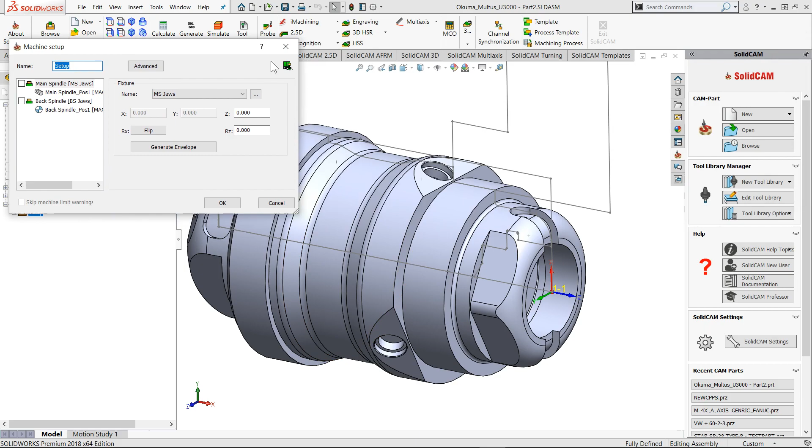First of all, I'd just like to go through the setup. I think this is very important. The machine setup allows us to correctly define the jaws and part position, whether it's on the main spindle or back spindle. As you can see, everything is pretty dynamic. I can modify the part position and jaws position. The jaws can also be a 3D model.

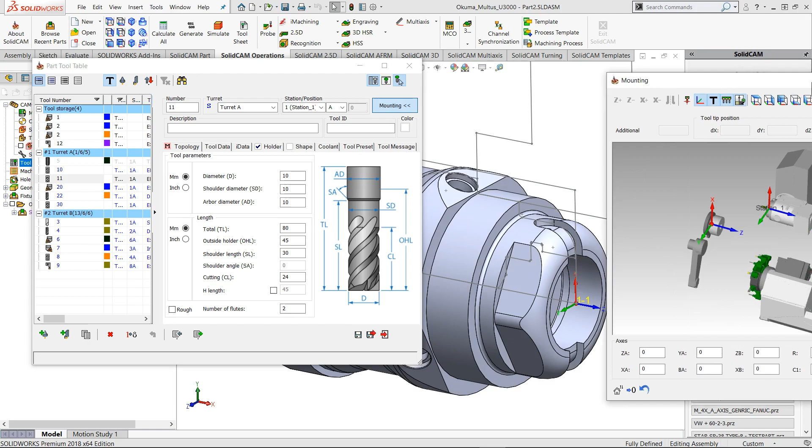Also here we have a tool table, and for the tool table we have all the tools presented in this project. I can click on, for example, the turret A, and again we have a machine preview with all the tools available here. As you can see, this one is selected. I can switch to other tools, maybe a different holder is used, or a turning one. Let me go back to this one. I'd just like to show you how dynamic it is. I can change the diameter to 16 and you can see it changed over here.

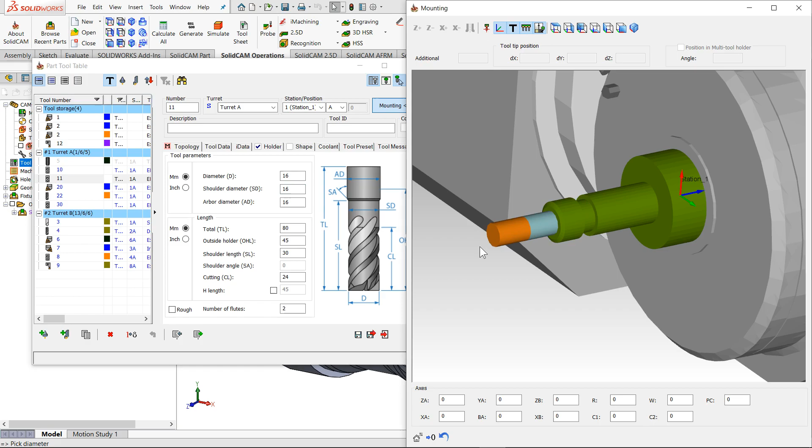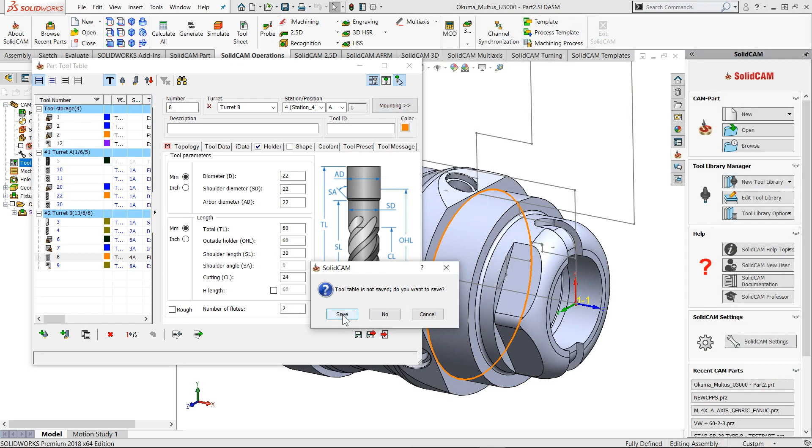Let me go to the lower turret for a moment. We have turret B where you can index to any other turning or milling tool over here. It will index it and you can actually modify it to your will. I'll not save this, I'll just exit, and I'll say no. Now I already have all the operations defined over here.

What we have here are the turning operations, center drill operations, 5-axis simultaneous drilling, C-axis milling from the face, something with the index, drilling on the index angle. Then we have a part transfer from the main spindle to the back spindle, and we have a couple of similar operations also on the back side.

Now, the very necessary step before G-code generation and going to the machine simulation is the channel synchronization. To go to channel synchronization, we have an icon for it, and this is its interface. I won't go into all the details, but basically whatever you see on the left side is for turret A, and whatever you see on the right side is for turret B. The black lines just display the wait labels for the G-code.

If everything defined here is possible to do on the machine, SolidCAM will allow you to generate the G-code and also simulate it. Otherwise, it will not allow you to do so. So I'll just go to the G-code generation and click OK. When clicking on that, SolidCAM goes through the postprocessor, which includes the kinematics and also the format for the G-code.

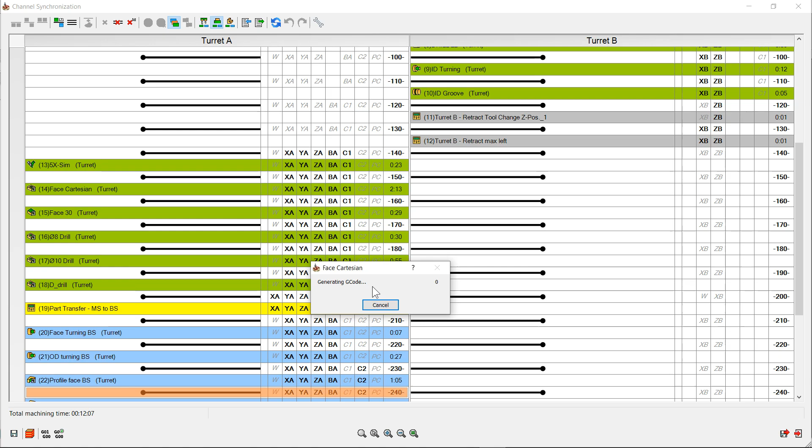Over here, we are checking if the axis overruns a little bit. As you can see, this is for the lower turret, for the drill operation drill 22. In this case, I'll just ignore it. I just wanted to present this to you.

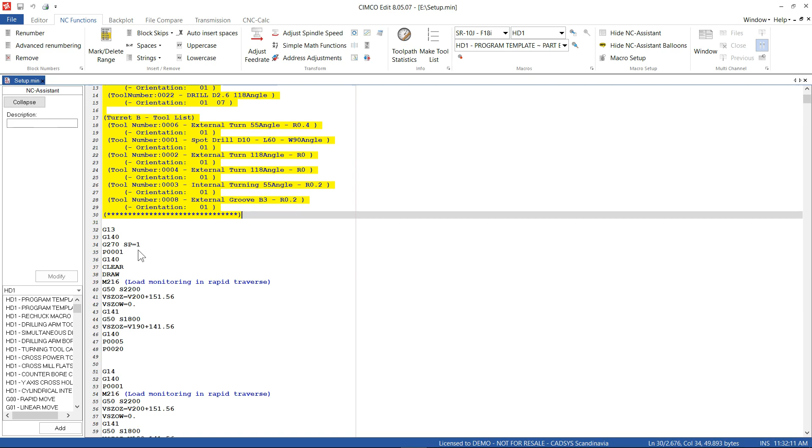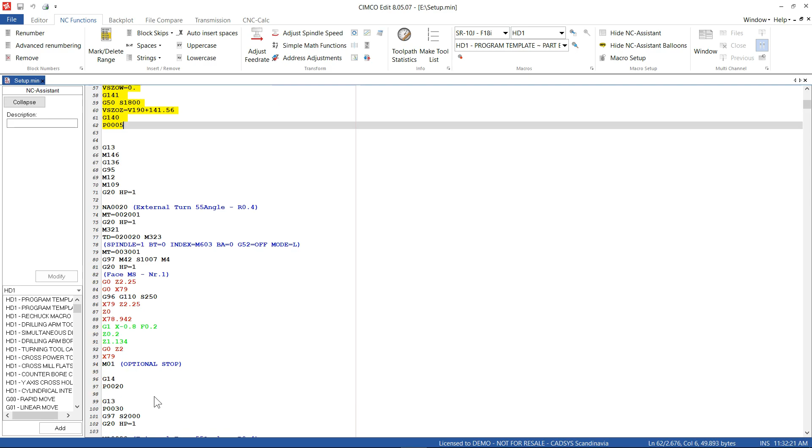Once everything is done, I'll close those two. Here we have how it looks like. We have all the tools over here in the header, and the project name. Also, we have a couple of codes for loading the work offset on the main spindle, also for the back spindle. Then we have turning operations, also for outside turning. As you can see over here, we have a cycle.

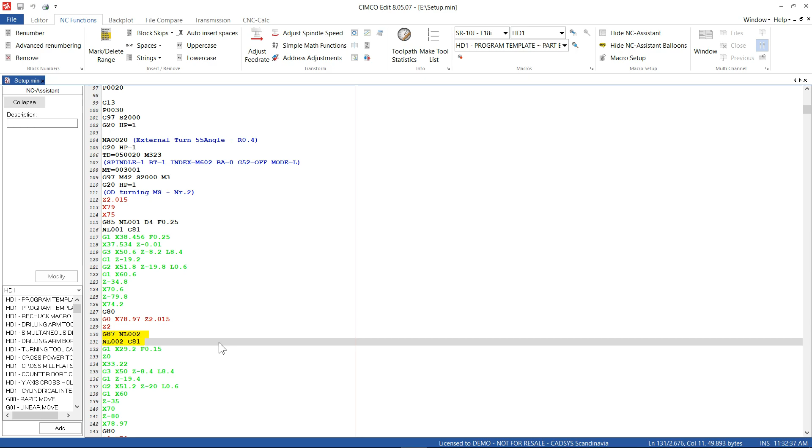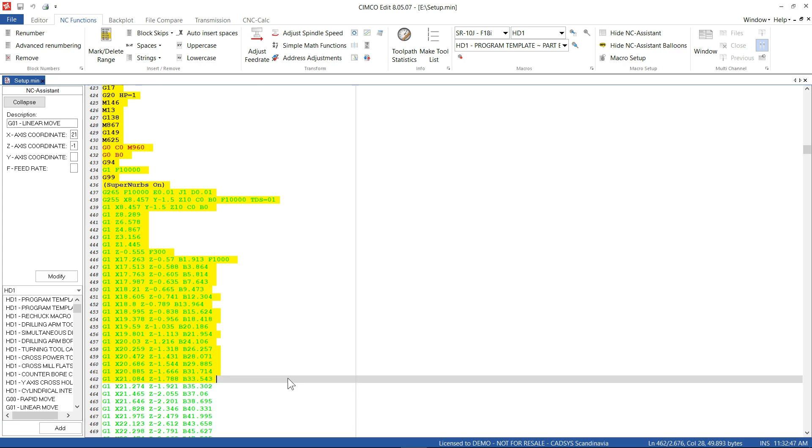This is for the outside roughing. Also, afterwards we have it for the finishing. I'd also like to show the 5-axis code, we have that over here as well. Let me just minimize this. And here we have this outside diameter turning operation.

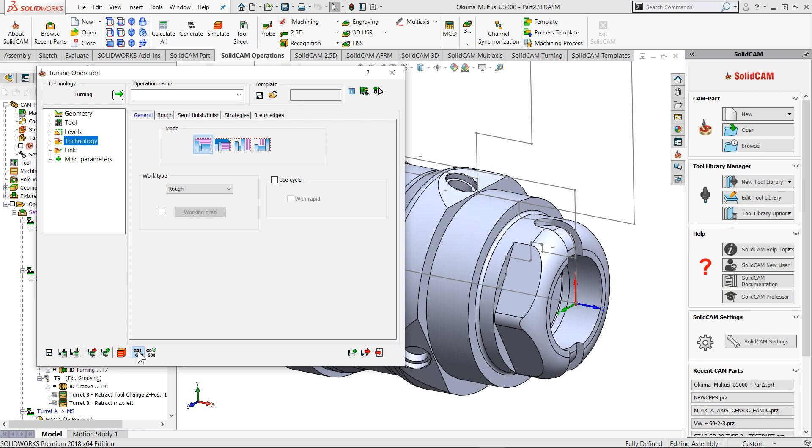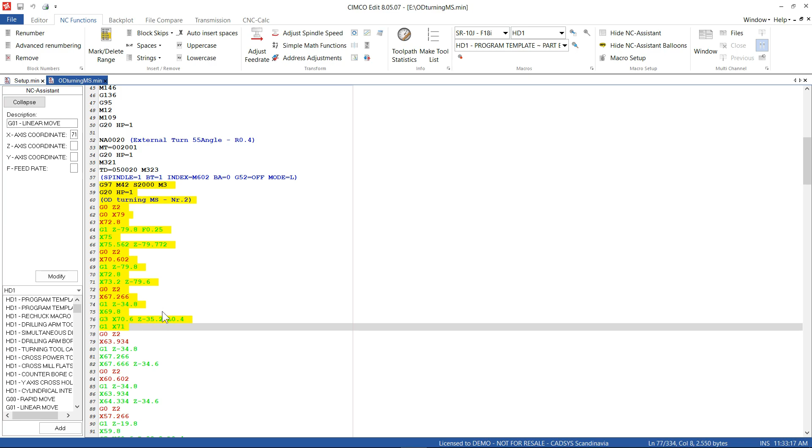I just double click on this operation. As you can see, we are using the cycle here. If you're not willing to use the cycle, you can just uncheck it and generate the code again, and a new code only for this particular operation will be generated. As you can see here, only this operation is affected. Now we are not using the cycle, but it's split into G1, G2, G3 lines basically.

Also what I would like to show you here is the drilling operation. As you can see here, it's on the inclined angle, and it's multiplied 3 times on all 3 angles, and I'll just do g-code generation for at least one as well.

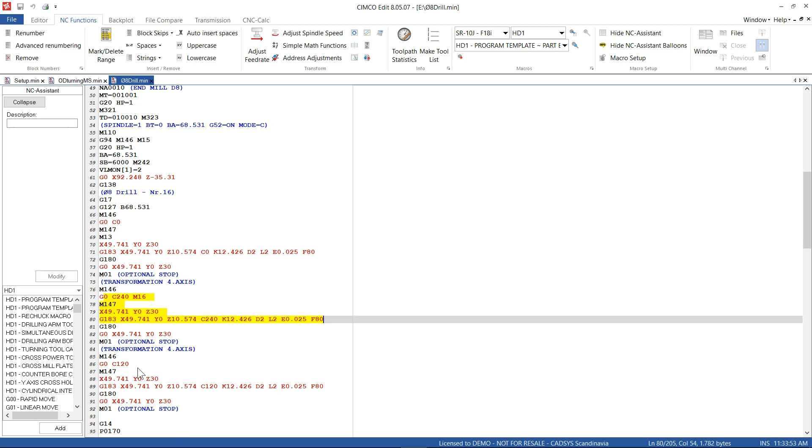What is very interesting here is the code. We do have a cycle with all necessary parameters, also with a B-axis angle, and all 3 cycles itself. But let me just jump to this operation.

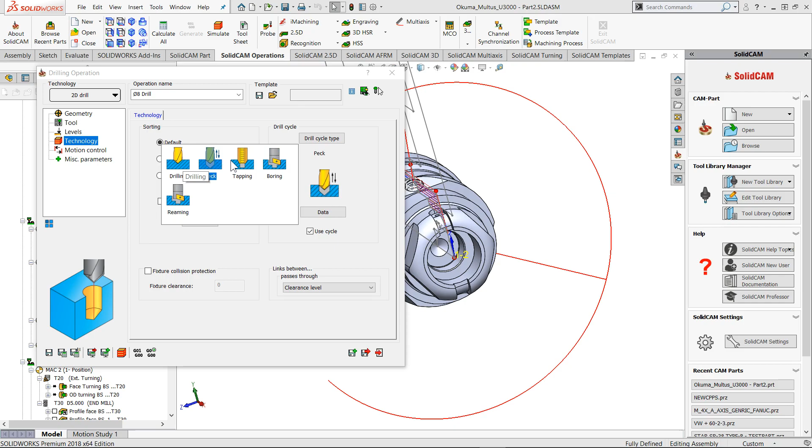This use cycle is by default checked on, but you can check it off if you wish. Also, here you have the drill cycle, and I'll just go over here, and you can see all available drilling cycles for this particular machine.

Let me just recalculate this, but not all. The last feature I want to show you is the machine simulation. I'll just go very quickly through some of the things.

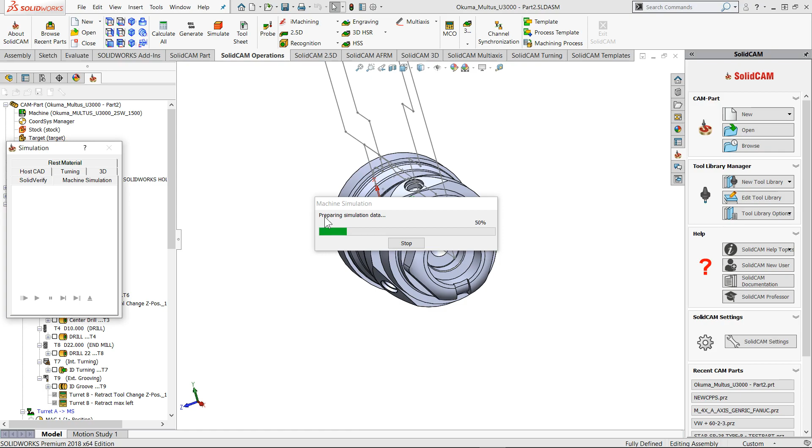Very nice to me also, so I'll just go to the machine simulation. All the data that we have done, also in channel synchronization, is now sent to the machine simulation. I don't like this task pane to be here, so we will get more space if we turn it off. Let's just wait a couple more seconds.

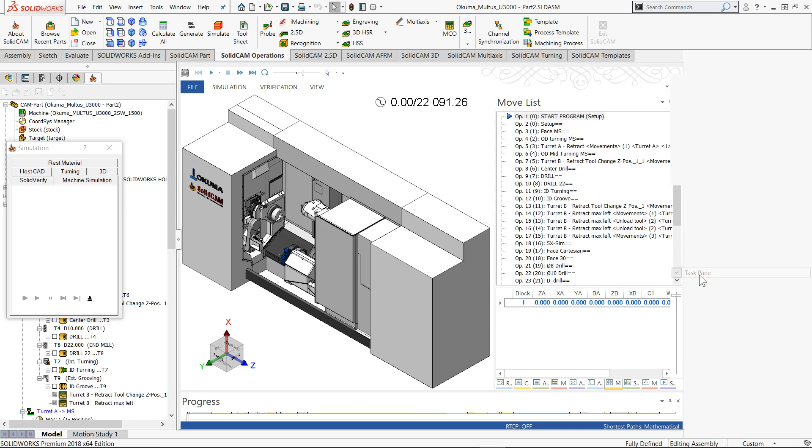All right, so I will just turn the task pane off. Maybe I can use smaller icons over here. So now we have enough space.

We can see all the tools, we can see also the part catcher, we also have the move list over here, so we have all operations done in this project. We can also have the report, which we will also see.

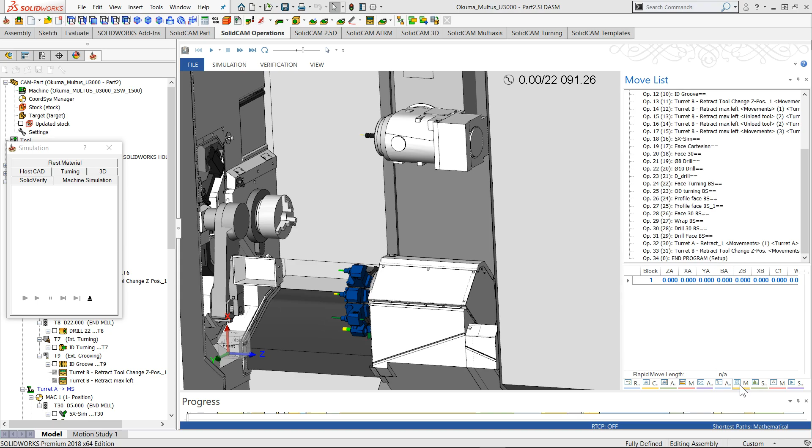Also axis control, we can also do move it and so on. So I'll just run it and show you how everything actually looks like.

We have a few turning operations here, finishing, going to safety position. Then we did something with a lower turret, turning, center drill. Also, doing something with the z-axis is possible.

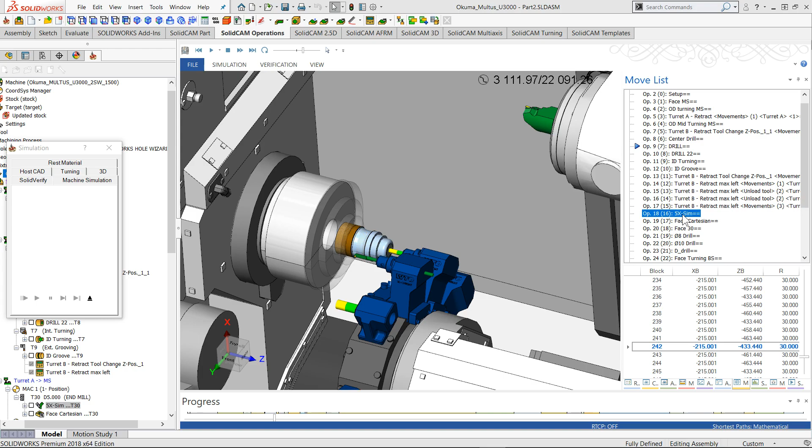It's very important that I can stop at any moment. For instance, I can just jump to this 5-axis simultaneous operation. Doing that, the machine simulation will verify all the movements, so if any collision happens, we will verify that one for sure.

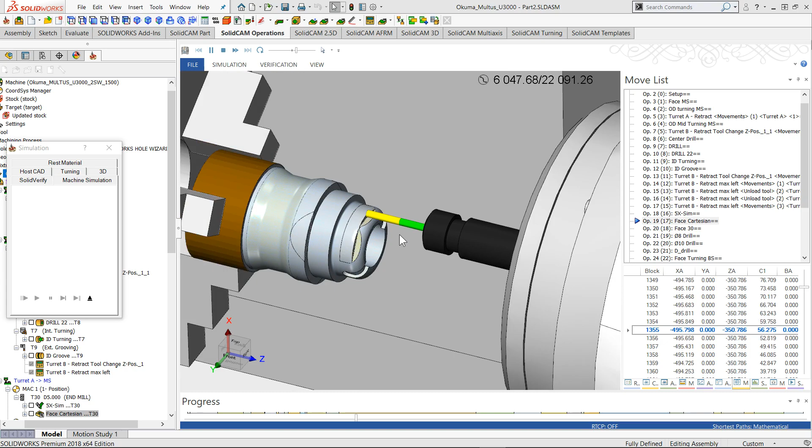I'll just run it. Here it is. This is like a z-axis milling from the face. I can just jump to face 30 degrees here. I also like this one.

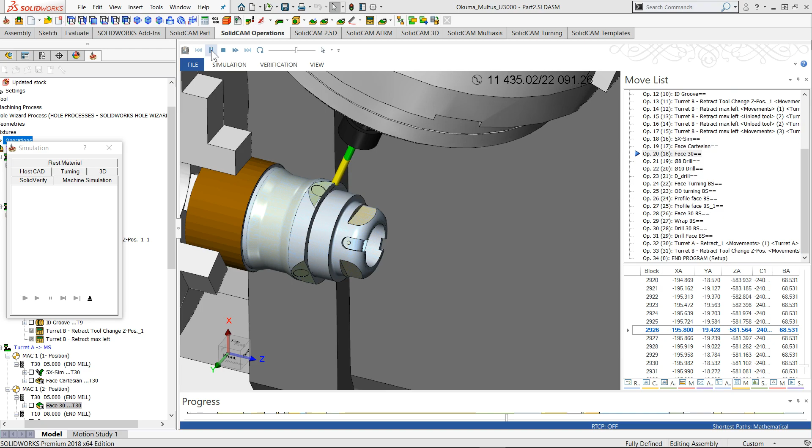That's pretty much, I don't want to. I'll just run it and so on. I'll stop it. Yeah, cool.

The next feature I would like to show you is how easy it is to go from one machine to another. In this case, I'll just double click on the CAM part definition itself, and I'm going to go from Multus to Macturn. Of course, it's reasonable to ask what will happen with the tools, with the drilling cycles, if there's any difference in the drilling cycles.

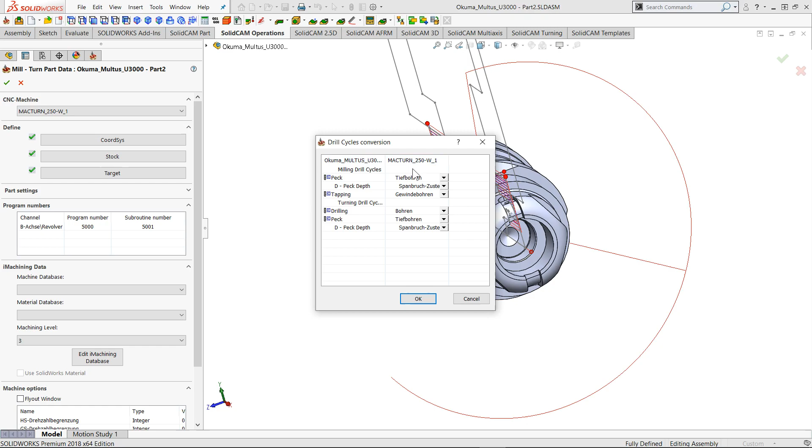SolidCAM will recognize that and will give you this kind of interface where drill cycle conversion can be done between machines. Of course, the kinematics itself is checked, also the spindles.

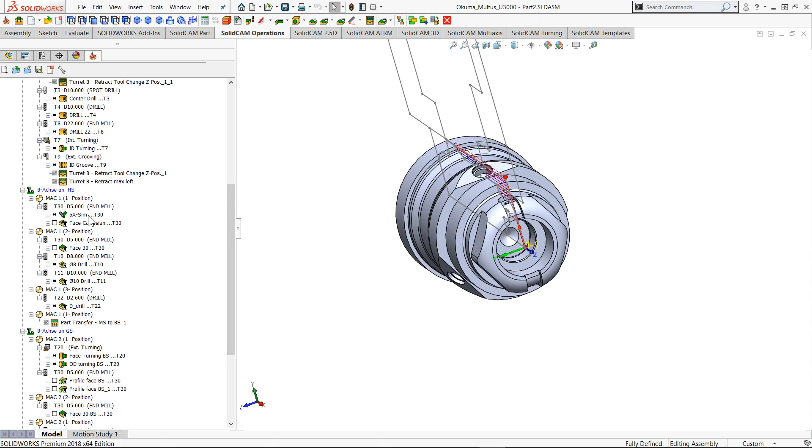So if, for instance, the Multus can go up to 12,000 RPM on the upper turret, while on the Macturn that's not possible, you will probably get error messages. Also, 5-axis simultaneous operation is not possible to do on the Macturn.

So I'll just recalculate all. Yes, I would like to recalculate everything now. And as you can see, for the 5-axis simultaneous operation, it says, hey, I cannot do that on this machine.

So what I'm going to do here, I just right click, I'll exit, right click onto this operation, and I'll just suppress it for this. I'll suppress it, right click, simulate it, recalculate it, not from scratch.

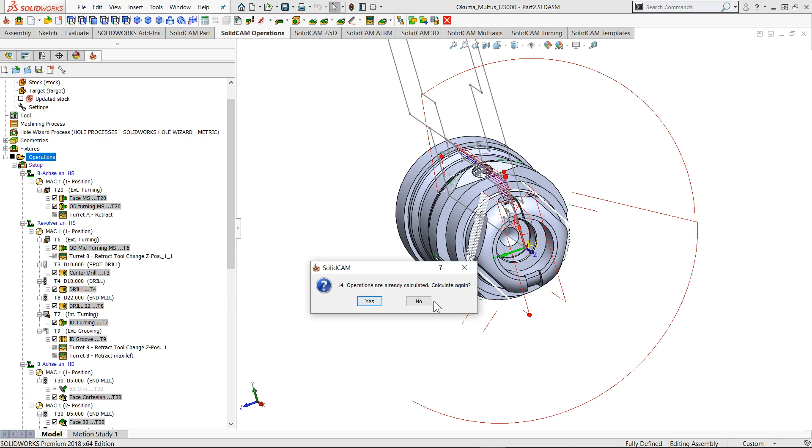All right, let's go to the channel synchronization, since it's asking us to do that. So I'll just remove all the labels, synchronize everything according to the correct order, and just generate the code.

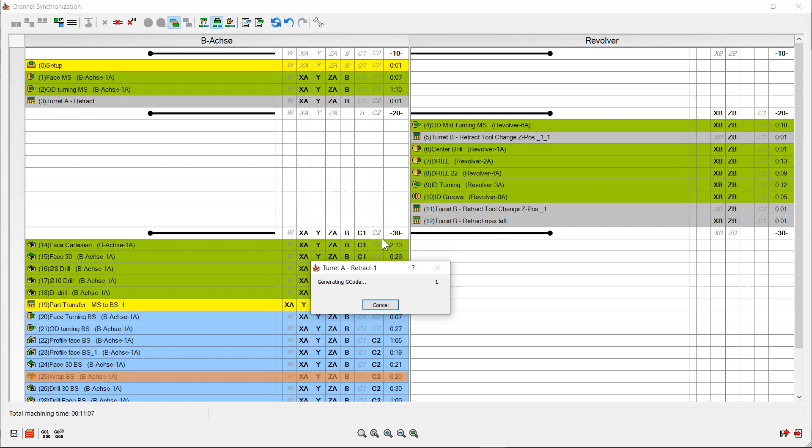That's it. This is for a completely new output.